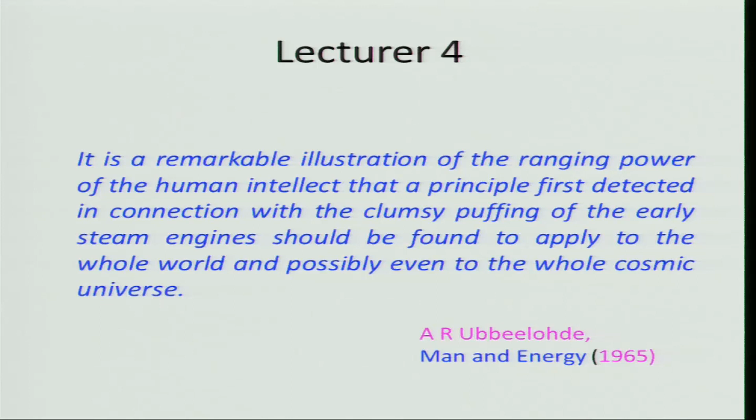Let us start this lecture with a thought from Ubbelohde, who says that thermodynamics is a remarkable illustration of the ranging power of human intellect, that a principle first detected in connection with the clumsy puffing of early steam engines should be found to apply to the whole world and possibly even to the whole cosmic universe. That means thermodynamics is a very important subject that encompasses all the processes occurring across the entire universe.

Before getting into the tenets of thermodynamics, let us look at how aerospace propulsion can be based on three subjects. One is thermodynamics, basically the engineering thermodynamics we will be looking at, and another is gas dynamics. Keep in mind gas dynamics is connected to thermodynamics as well, and so is combustion, which is very important because we are interested in propulsive devices that use chemical energy.

So we will be looking at all these fundamentals related to these three things first, because these tools will be important to analyze the propulsive devices. Now we will be reviewing thermodynamics, because you have already learned on several occasions about the basic principles of engineering thermodynamics, but for completeness sake I will start from the very basic principles.

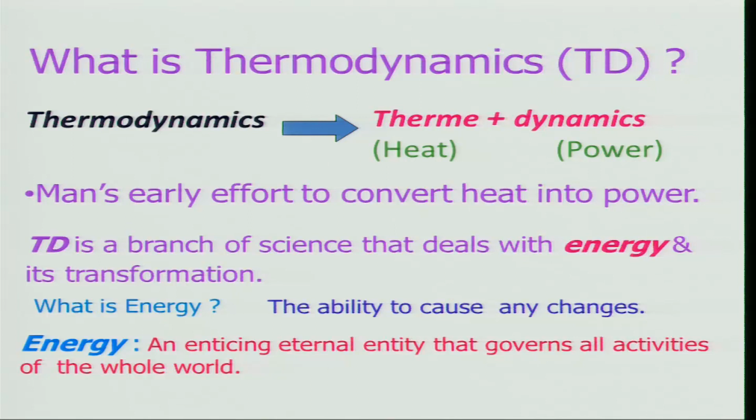So, everywhere energy is there. Whatever you see, any action, any reaction, anything occurring across the whole universe is nothing but a manifestation of energy. That is very important. Therefore, I can define energy as an enticing eternal entity that governs all the activities of the whole world. World means the entire universe - stars, planets, galaxies, and even our day to day life. All is basically a manifestation of energy.

Whenever I want to have a thrust power, I need to use chemical energy and convert it into thrust power in aerospace propulsion. Of course, you can use other forms of energy, as we have already discussed - nuclear energy, solar energy, and electrical energy. But basically what you are doing is trying to convert or utilize this energy into thrust power. That is the basic idea of propulsion.

So, whenever you talk about thermodynamics, can it be connected to life? If you recall, thermodynamics has three basic concepts or principles on which it works. One is energy, which we have already discussed. There is another concept known as entropy, which we will discuss later. And whenever you talk about energy and entropy, we need to talk about equilibrium. These three are connected to each other, and together they govern the principles of engineering thermodynamics, or classical thermodynamics.

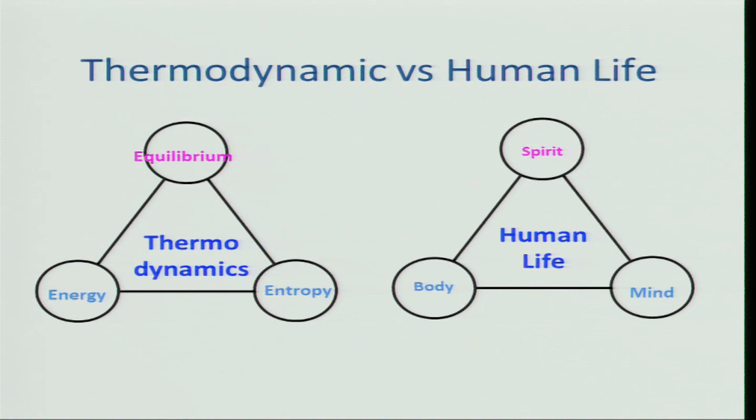Now, if I compare this with life, what are those things? One is your body, other is your mind, and this is the spirit. This is very important for sustaining a balanced human life. These three components must be balanced, and that is the basic objective of education - to have a balanced life between the body, mind and spirit.

When you look at the present or modern education system, it does not subscribe to these things. That means it is violating the basic principle of thermodynamics, which is governing all the activities of the world, according to me.

It is not according to me, but the great scientist Albert Einstein feels that way. He comments that a theory is impressive, the greater the simplicity of its premises, the more different kinds of things it relates, and the more extended its area of applicability. Therefore, the deep impression thermodynamics made upon me - it is the only physical theory of universal content which I am convinced, within the framework of applicability of its basic concepts, will never be overthrown.

That is the power of thermodynamics. But let me remind you that it is the steam engine which brought forth this subject as a magnanimous subject that encompasses all the processes or activities of the entire universe. That means engineering leads to a science which is now very extensive in nature.

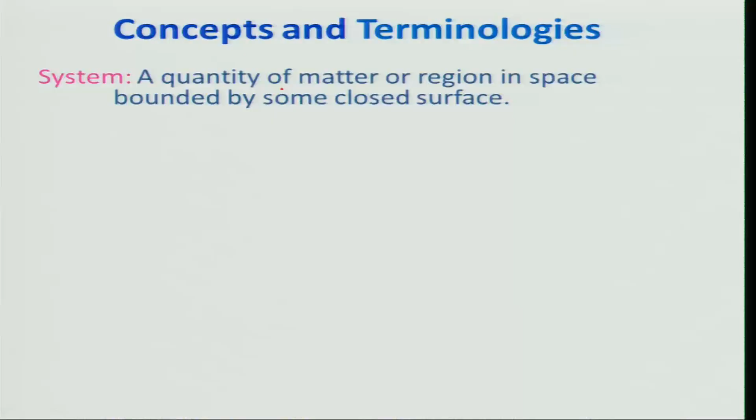Let me take another example of a hot coffee cup. If I take a hot coffee cup and keep it on a table, I am interested to look at how it is interacting with the surrounding. What will be the surrounding? First I need to identify the system, its boundary, and when I identify a boundary, I need to look at what I should consider as a boundary. Should I consider the hot coffee, if it is full to the brim of the cup, as the boundary, or should I consider the full cup itself as the system boundary? That depends upon your choice and what you want. But what will be its surrounding?

How will I identify what is its surrounding? Suppose my cup of coffee is here, and if you are sitting far away, can I consider this as surrounding for this system? By definition it is, but it cannot be. How?

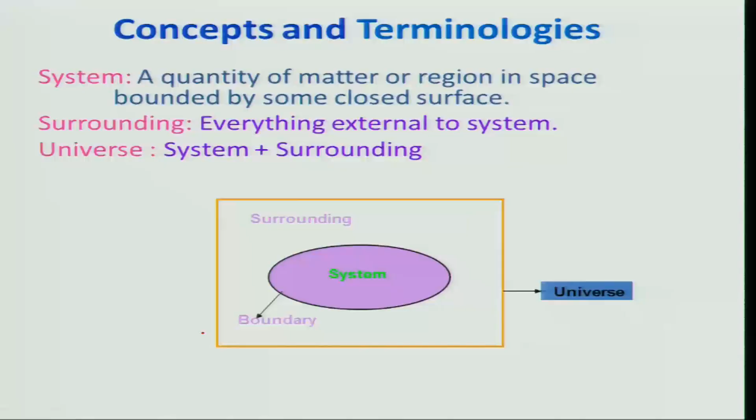So what we need to look at basically is the boundary. The boundary can be real or imaginary, and it separates the system from its surrounding - that we already know.

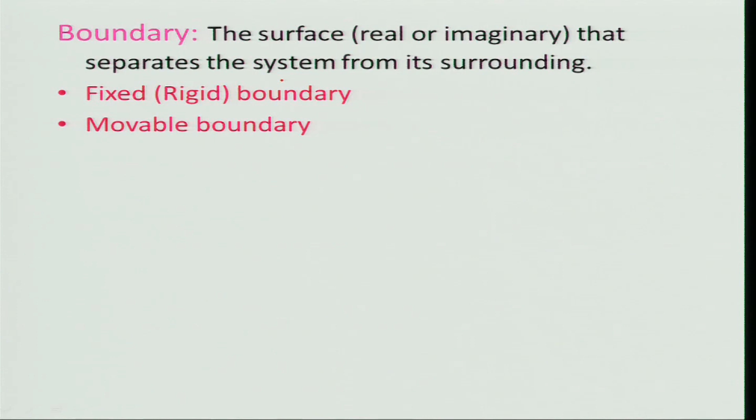But how many ways can we divide or classify this boundary? There can be a fixed or rigid boundary, there can be a movable boundary. There can be a diathermal boundary where heat interaction takes place between system and surrounding, and there is another type of boundary where there is no heat interaction taking place - we call this an adiabatic boundary.

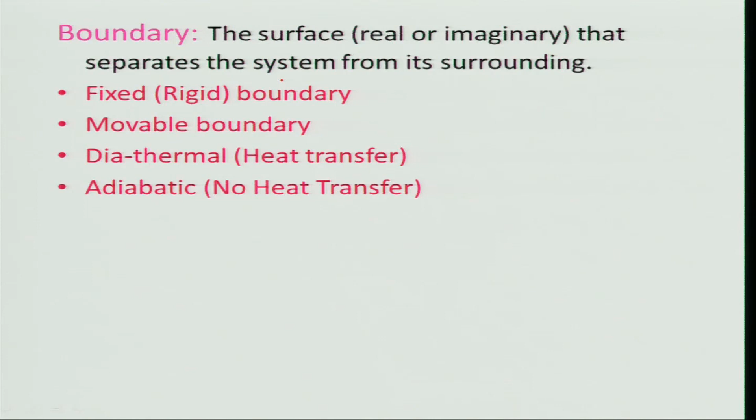So we are aware that there are several kinds of boundary, but in the case of propulsive devices, can we use this, and where and how we will use it is a matter we will be concerned about. So let us look at how many ways we can classify a thermodynamic system. Can anybody tell me, since you all know these things, I just want to review it - how many ways can we classify the thermodynamic system?

What are those? Open system, closed system and isolated system. That means we can classify the thermodynamic system into 3 categories: open system, closed system and isolated system.

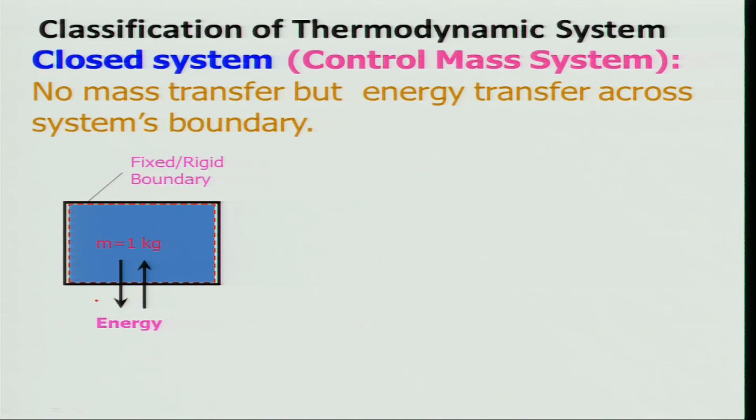So there will be change in the pressure, because volume is remaining constant. There will be interaction between system and surrounding, because this dashed line which I have shown is your system boundary, and nearby is known as the surrounding. Now this is known as a control mass system or a closed system.

And if I take a piston cylinder example, in this case the mass remains constant, it is not going out of the system boundary, but there is a heat interaction.

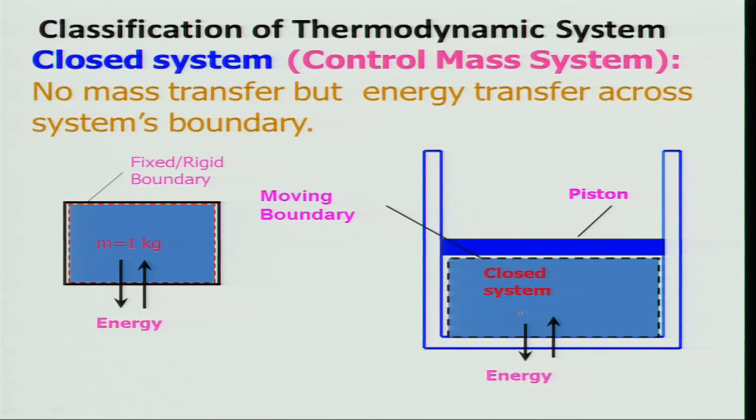Now, if you want to know how we can use this closed system in case of propulsive devices, can we really use it? Let us look at a closed system and how we can identify a boundary, because unless we identify a boundary, we cannot say which is our system. Both system and surrounding without any boundary will be the same.

So let us consider the earth, which I have shown here. This is the beautiful earth, looks quite interesting, and these white color things are because of precipitation. There will be a lot of mass coming, evaporated, going, and recirculated, and also your pollutions and other things.

Now what is happening? The heat is coming from the sun as solar energy input into the surface, and some of the heat will be going out as I have shown. Now I am interested to find out what will be the surface temperature, and use it as a closed system.

So how will I go about it? For example, if I take this as my boundary, meaning the whole surface of the boundary, can I call it a closed system? I cannot, because there will be evaporation.

The earth contains 70% of water. So, therefore, evaporation will always be taking place across the whole globe, because we are interested in global temperature, not local. One temperature, what is happening, we are interested to find out.

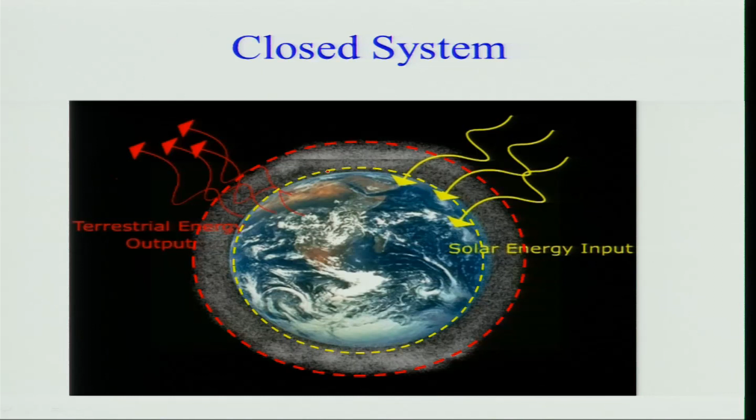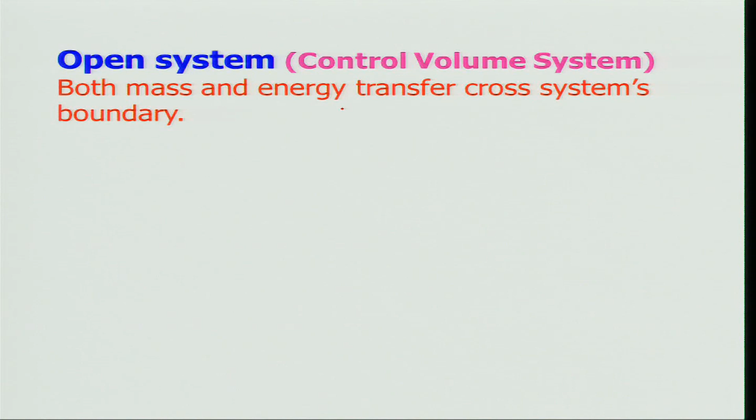Let us look at an open system, which we also call a control volume system. In this case, both the mass and energy transfer will be taking place across the system boundary. That means whenever the system is interacting with the surrounding, it will have transfer of mass and also transfer of energy.

For example, the same example I am taking, it is from the surface of the sea, where there will be solar radiation and also terrestrial radiation, evaporation and precipitation, all those things will be taking place.

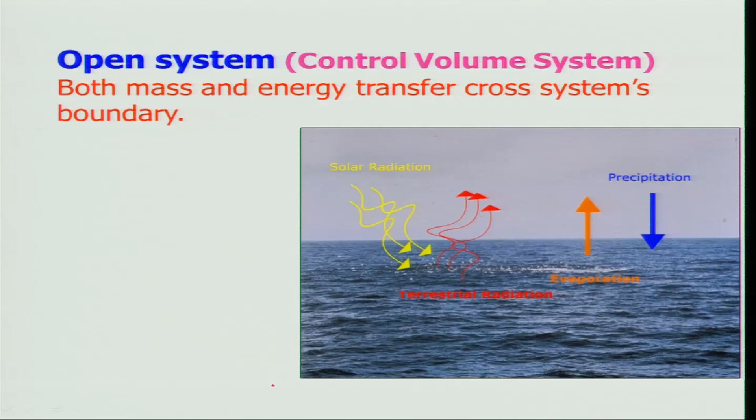If I want to have a boundary, I can take this as my system boundary and look at an open system, what is happening. For example, we can take an air intake in case of a gas turbine engine, where the fluid or air gets into this diffuser or air intake and goes out. There will be some interaction between system and surrounding, because this dashed line I have taken as the system and the rest will be surrounding. So we need to identify what to call a system.

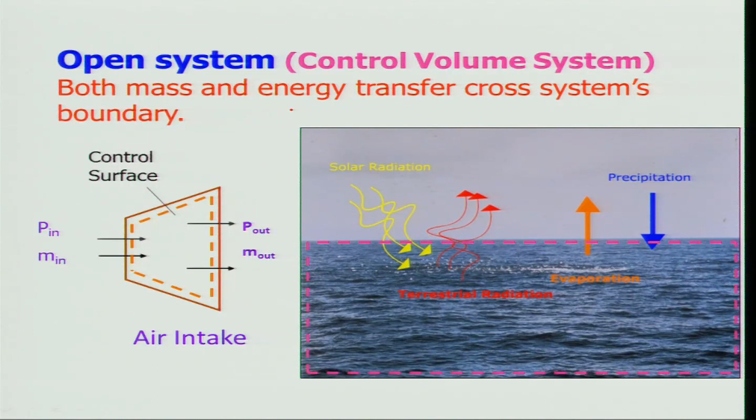Now the question arises whether we will go for a closed system or an open system, where it will be convenient, and how we choose its system boundary is a matter of concern that depends on the individual and the problem at hand. Most of the time, in our propulsive devices, we will be using the open system.

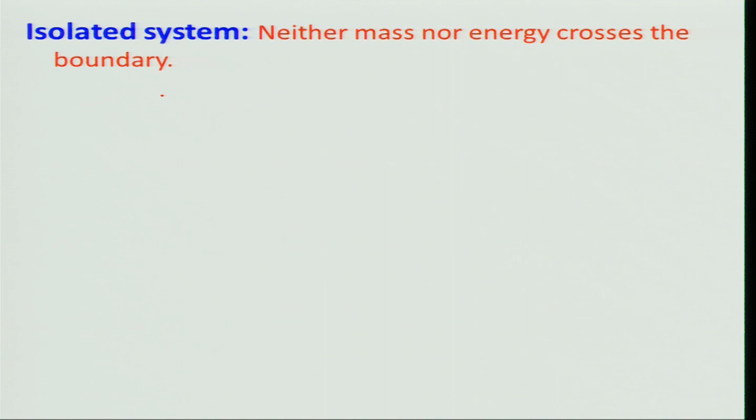However, whenever we are using the piston engine, we need to consider the closed system, and in some places we may consider an isolated system, where neither mass nor energy crosses the boundary, so there will not be any interaction. But then when will you use it? It is useless to have this kind of isolated system. Am I right? Then why is it there? Open system we may understand, closed system we may understand, but why an isolated system, with neither interaction of mass nor energy?

So far as a thermodynamic system is concerned, energy interaction is essential. But I want to get the answer from you. Let me just tell you briefly that this is used very much whenever you talk about the second law of thermodynamics, therefore it is very essential and important. I do not want to get into that here; please go back and look at your thermodynamics book and see how they have handled the analysis of entropy in a system.

So what I would suggest is that a particular type of system must be identified carefully for thermodynamic analysis of any problem, even in propulsive devices, because otherwise everything will be wrong. Unless your initial condition or identification of boundary is proper, all other things will fall apart. So therefore it is important.

Now whenever we talk about the interaction between system and surrounding, we need to look at how the properties of a system are changing, and what we mean by properties. This is important because a system contains a certain amount of matter, and it will be interacting and changing its state during that. So therefore we need to understand property.

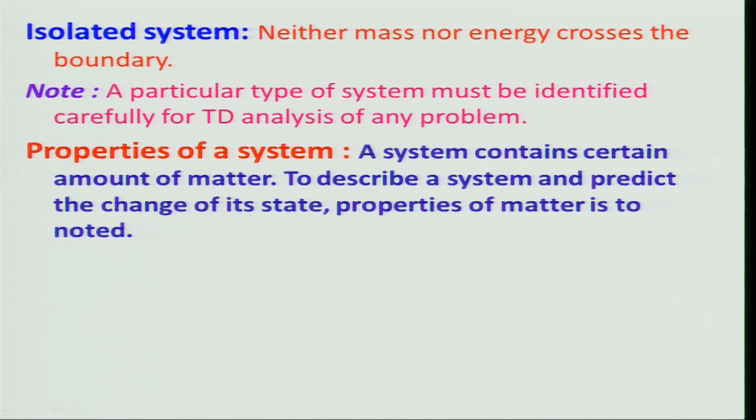So if we ask, what do we mean by property, it would be the state of the system, or the attributes of the system, or characteristics of the system. If I say, what is the property of a human being, can anybody tell me? We are all worried about the property of a system, a certain matter, maybe iron, what are its properties, what about aluminum, what are its properties, but we should know what is the property of a human being. That is more essential than talking about other materials, but we never worry about it, nor does education give an opportunity to think about it. I would suggest you think about it.

So a property is any observable characteristic of a system — attributes of a system which can change and which you can repeatedly observe changing. For example, if I say water is a colorless, odorless, or maybe tasteless liquid — is water tasteless or tasteful? Tasteless? That depends on the salt content it is having. So can I call these the properties?

We can call it a property, so far as the potability of water is concerned, but when we are talking about thermodynamics, we are not really interested in those properties — they are not of much value for thermodynamic analysis. So when we talk about the properties important for thermodynamics, we call them thermodynamic properties, which must be associated with energy and its transformation, because thermodynamics can be considered the science of energy, its interaction, and its transformations.

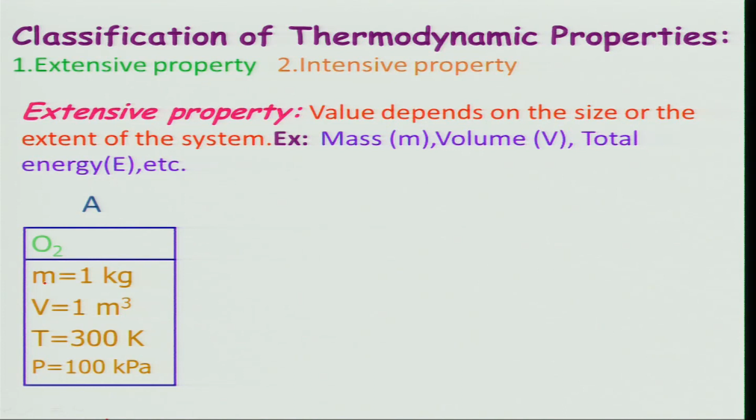Consider tank A contains oxygen with mass of 1 kg, volume of 1 meter cube, temperature of 300 Kelvin, and pressure of 100 kPa. I will take another tank with the same volume, same mass, and same properties, and add them together. What do we get? We get a volume of 2 meter cube, mass of 2 kg of oxygen, and the temperature is still 300 Kelvin and pressure is still 100 kPa.

So that means if you look at temperature and pressure, they are not changing whenever you add or in some cases subtract. That means it does not depend on the extent or size of the system. Therefore, we call it an intensive property.

However, we also use another property known as specific property. For example, specific volume. By definition, specific volume is volume divided by mass. Volume is an extensive property, mass is also an extensive property, so the ratio of it is an intensive property. We will be using that, but I will not discuss it now, as you are all aware of it.

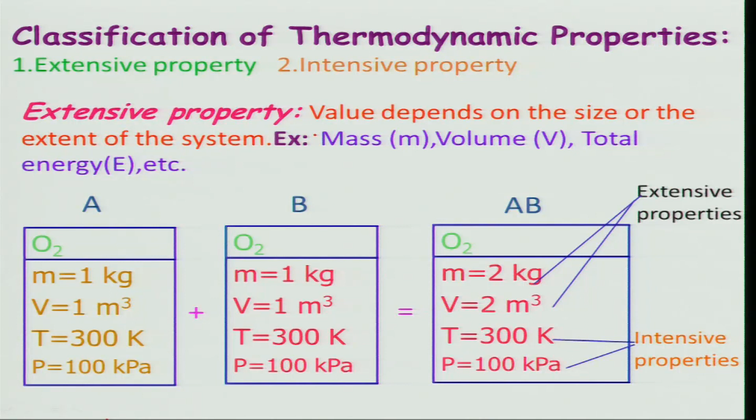So, what do you mean by thermodynamic equilibrium? You must be knowing that engineering thermodynamics always deals with equilibrium systems. So we must understand what it means for a system to be in thermodynamic equilibrium.

Let us consider a copper block at 70 degrees Celsius and another copper block at 30 degrees Celsius, separated by a divider. Then we remove this separator so both blocks come in contact, and allow enough time such that there is heat transfer from copper block 1 to copper block 2, until it reaches a temperature of 50 degrees Celsius. That means it has reached a steady state and equilibrium, because everything is insulated. This block together is in equilibrium; there is no change occurring between these two blocks.

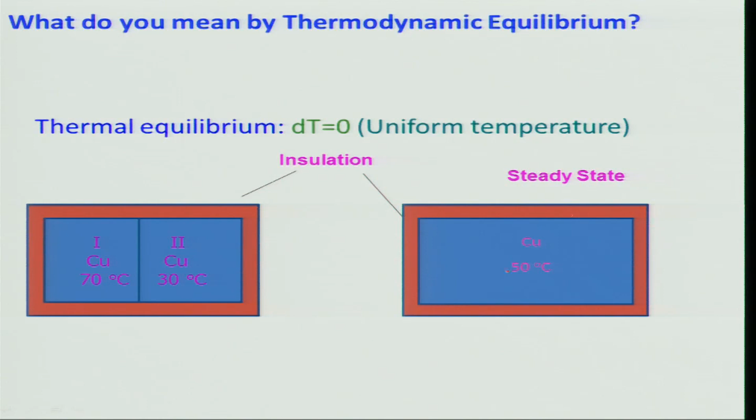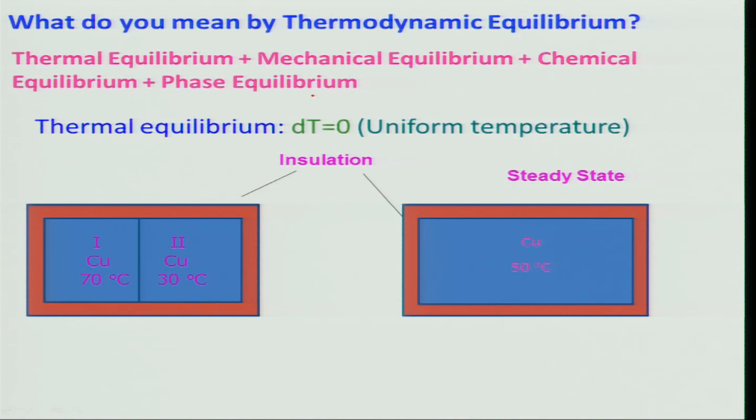So, can we call it a system in thermodynamic equilibrium? Yes, but certainly no—it is basically thermal equilibrium, meaning uniform temperature across the system. Something is missing. We call a system to be in thermodynamic equilibrium only when all these equilibria—thermal equilibrium, mechanical equilibrium, chemical equilibrium, and phase equilibrium—are being satisfied and maintained.

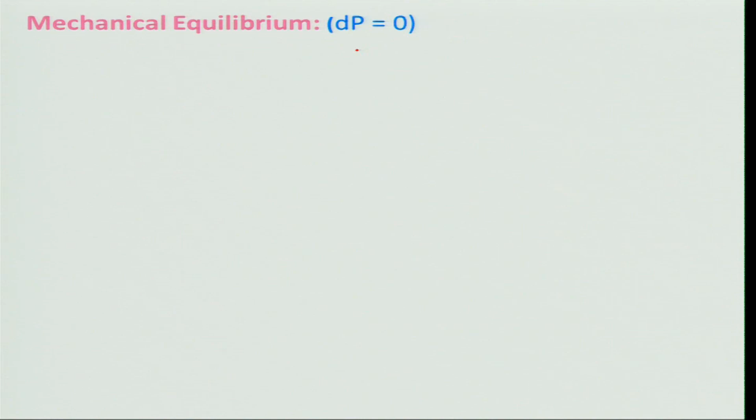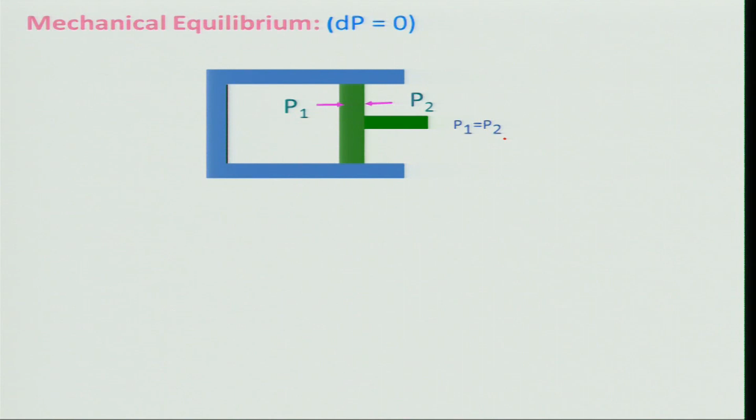So, let us consider what we mean by mechanical equilibrium, where pressure difference across the system boundary will be zero. For example, if I take a piston cylinder arrangement and consider this white portion as our system, there is a pressure P1 applying and an external pressure P2; when P1 equals P2, we call it mechanical equilibrium.

Let us consider another example: hydrogen, 2 moles of hydrogen reacting with 1 mole of oxygen, giving the product of 2 moles of water, at a particular high temperature, meaning some reaction is taking place, otherwise water will not be formed at low temperature. If I allow this reaction to take place for quite some time, we will see there is no more reaction taking place. But it is not true — what is happening is that the forward reaction rate becomes equal to the backward reaction rate, and then the system attains chemical equilibrium.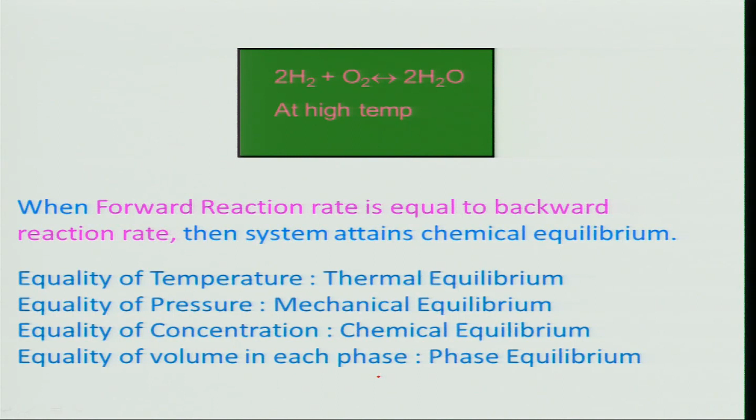So let us try to recall what we mean by a reversible process. Whenever a system and surrounding return back to its initial state, we call it a reversible process. So all reversible processes are quasi static, but all quasi static processes are not reversible.

So what do you mean by quasi static? Can anybody tell me? Because this concept you will be knowing, I have not discussed it.

So when a reversible process begins, it is very slow. That means the gradient which will be there is very small, such that the changes will not be occurring abruptly, or the change will be very infinitesimally small. So there we call it a quasi static process.

For example, if I take a piston cylinder and put some sand grains on top of the piston, and then I remove a small sand grain from it, there will be a change in the gas system's pressure and the surrounding, but that change is very small. So therefore we call it a quasi static change.

Now, in life what do we need? We need to have a quasi static process, so that any changes occurring will not affect yourself or others dramatically or drastically. However, change is inevitable. So those quasi static processes are essential, but all quasi static processes need not be reversible. Keep in mind that all natural processes are irreversible in nature, but in thermodynamics we will be discussing more about reversible processes.

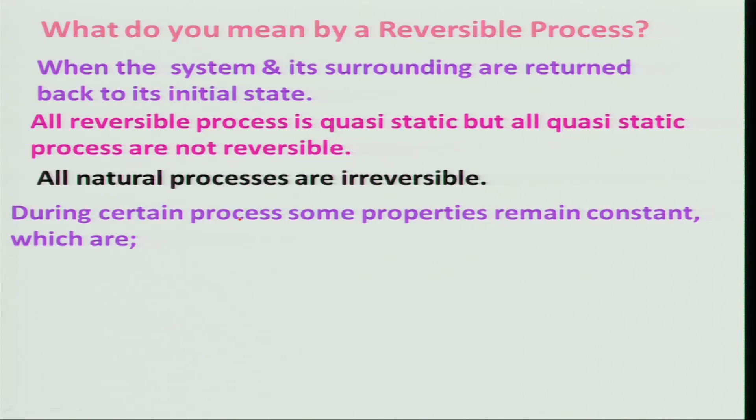During certain processes, some properties remain constant. For example, if temperature remains constant, we call it an isothermal process. If pressure remains constant, we call it an isobaric process. If volume remains constant, we call it an isochoric process. And if it is adiabatic, meaning no heat interaction between system and surrounding takes place, and reversible, then we call it an isentropic process.

So these processes which we will be using, particularly the isentropic process and isobaric process, will be used while analyzing the propulsive devices.

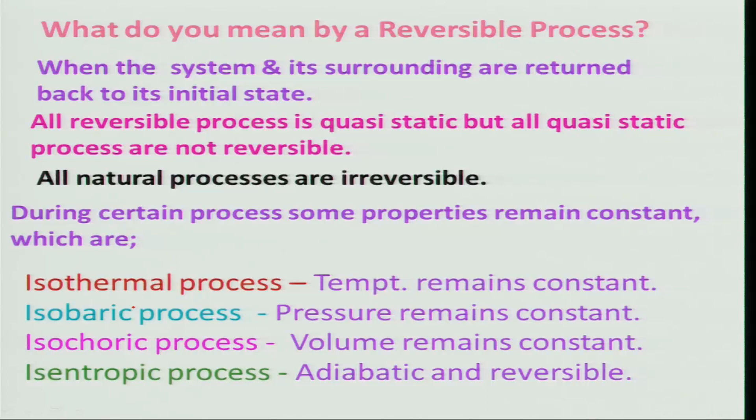Now the question arises, what do we mean by temperature? Because without temperature you cannot really think about any heat interactions. What do you mean by that? It is basically, in layman terms, a measure of hotness or coldness, whether it is cold or hot, and it is basically a qualitative description.

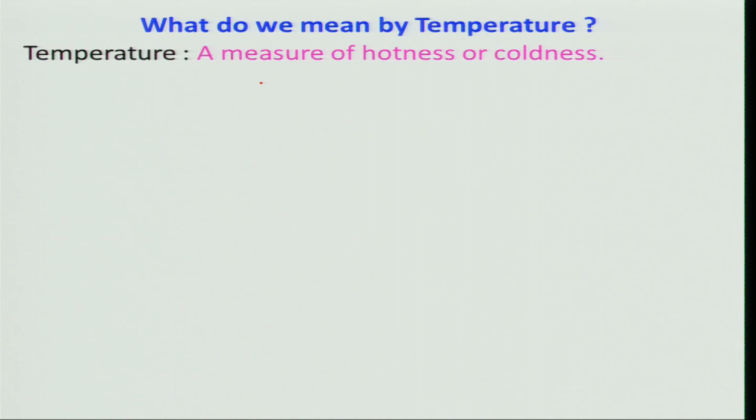That means it will be cold or warm, or it may be hot, it may be red hot, but can we really talk about it quantitatively? Then it will be a problem, because our senses may be misleading. It depends upon person to person, and depends upon the mood of the person also, and it will be misleading.

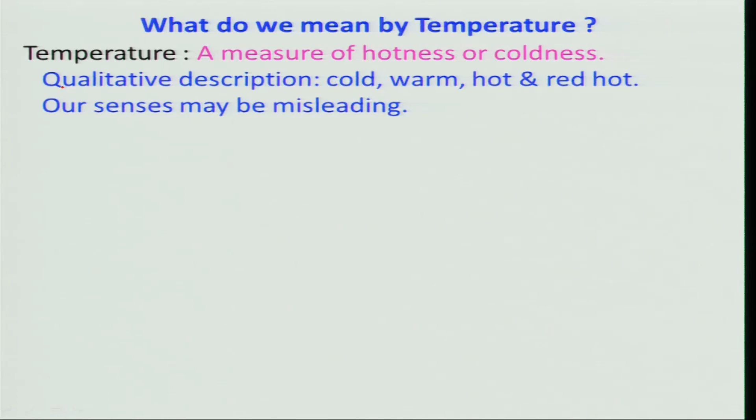Even if you take another example which is not having sense, but man can have a sense to observe. For example, if I take one wooden chair and one metal chair, kept at the same room, let us say in this AC room, having the same temperature almost, but if you go and sit down, or put your hand on it, you will feel that one of them is colder. Which one will be colder? Metal will be colder, whereas the wooden will be not that much compared to this. So therefore, it will be misleading.

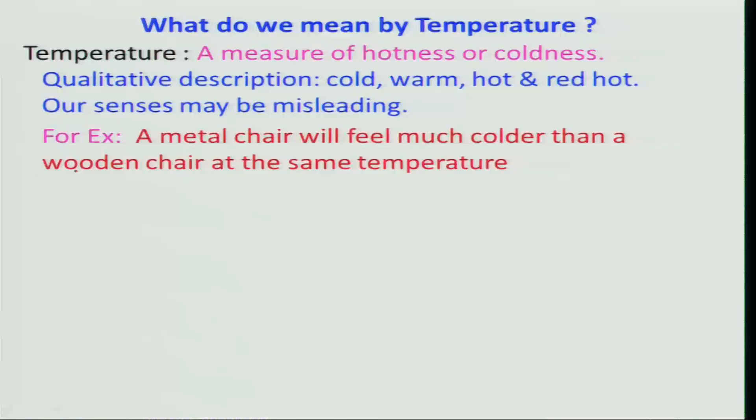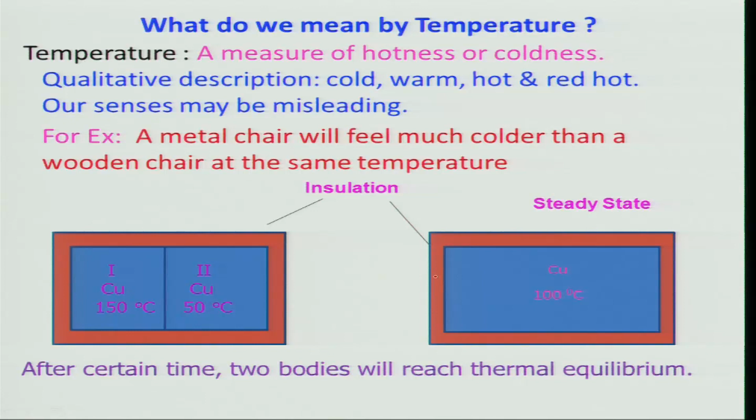Remember that whenever you have fever, we always use a thermometer, and then we allow some time for contact between the body and the thermometer bulb, and then you measure the temperature. So that we do routinely, and this is the basis of thermal equilibrium, the basis of the zeroth law of thermodynamics.

Let us consider there is a block A which is in equilibrium with B, and there is another block which is also in equilibrium with C. The block C is in equilibrium with B. That means the block A is in equilibrium with the block C. That is nothing but the zeroth law of thermodynamics: if two bodies are in thermal equilibrium with a third body, they are also in thermal equilibrium with each other.

This is a very common thing which was formalized by R.H. Fowler in 1931, after the first and second law were proposed. Therefore, it is known as the zeroth law. If you look at Galileo, he had devised a thermometer at that time, so it is not a new thing, but he formalized it. It is a thing which he experienced, but we did not formalize it into a law, and this law is the basis for temperature measurement, as I told just a few minutes back.

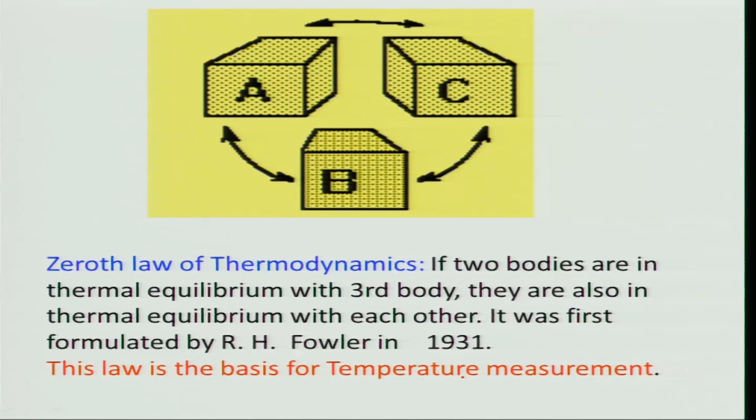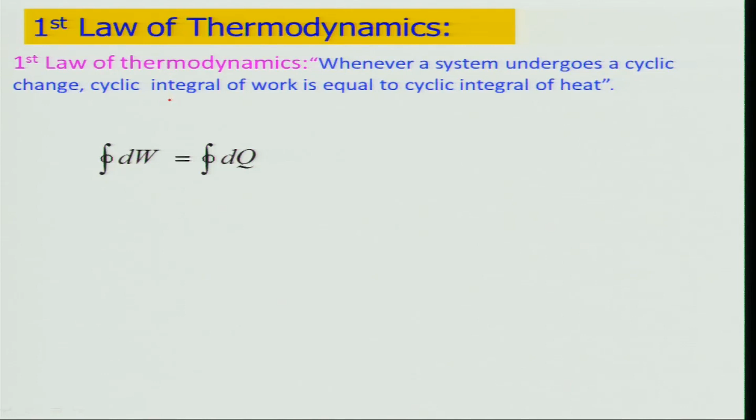So what we will now look at is the first law of thermodynamics. We state that whenever a system undergoes a cyclic change, however complex the cycle may be, the cycle integral of work is equal to the cycle integral of heat. So we say that the cycle integral of work is proportional to the cycle integral of heat. Keep in mind that for SI units, this proportionality constant is equal to 1. Therefore, I have stated directly that whenever a system undergoes a cyclic change, the cyclic integral of work is equal to the cycle integral of heat, and it was first proposed by the great scientist J.P. Joule in 1851.

Conducting a series of experiments, he took some 4 years to conduct several experiments to make this statement in a very systematic manner. And if I write it down in this form, that is, the cycle integral of dq minus the cycle integral of dw is equal to 0. This work is basically on the system, and if it is on the system there will always be a negative sign, as you know the sign convention, and work from the system is basically positive.

So the first law of thermodynamics is a generalization of several experimental data generated by J.P. Joule, who formulated it as the first law of thermodynamics. There was another person who was also working simultaneously or parallelly along with him, but he is not considered the proposer. Till now nobody has disproved this law, but it cannot be proved like a theorem in mathematics. That does not mean that nobody will prove it wrong. Maybe some of you may try it out, and then we will have to see.

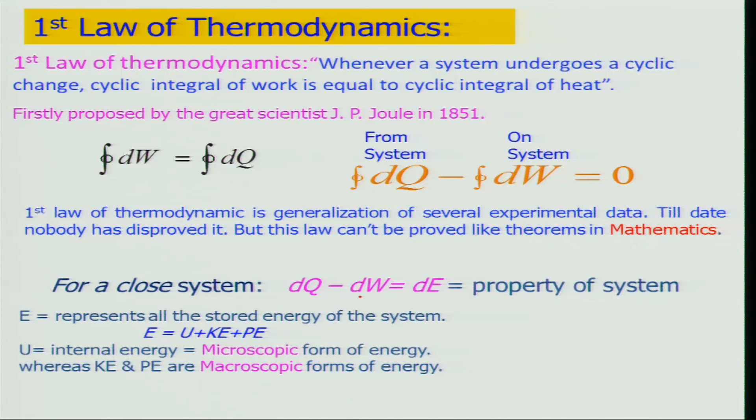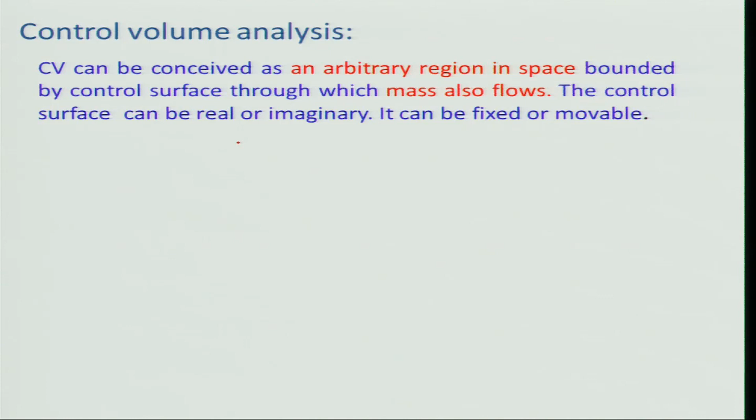So let us look at how we can apply this first law of thermodynamics for an open system, because we will be using it for the analysis of propulsive devices. Therefore, we need to learn how we can use this equation, the closed system equations, for an open system. We will elaborate a bit on this: a control volume can be conceived as an arbitrary region in space bounded by the control surface through which mass can also transfer or flow, and the control surface can be real or imaginary, fixed or movable.

Let us consider a system containing shaft work, which has heat interaction, and some flow is entering into the system while some mass is leaving the system. I have taken this dash line as my system boundary. If you look at this, it's basically an imaginary boundary — there is flow, there is no solid boundary, but you are imagining as if the boundary is there. Now, how do we analyze this?

For this, we need to understand how much mass is entering, how much mass is going out, and how much is being accumulated in the control volume. This is expressed mathematically as dm/dt equals m dot CV, which equals the summation of m dot in minus summation of m dot out. Keep in mind this is a general equation, but in this case there is only one inlet and one outlet, so for this control volume it will be dm/dt equals m dot in minus m dot out.

This is basically the law of conservation of mass, which is based on common sense — like your money flowing: how much money you are getting, how much you are using, and how much is being accumulated. So it's very much common sense you can apply, and this is known as the continuity equation as well.

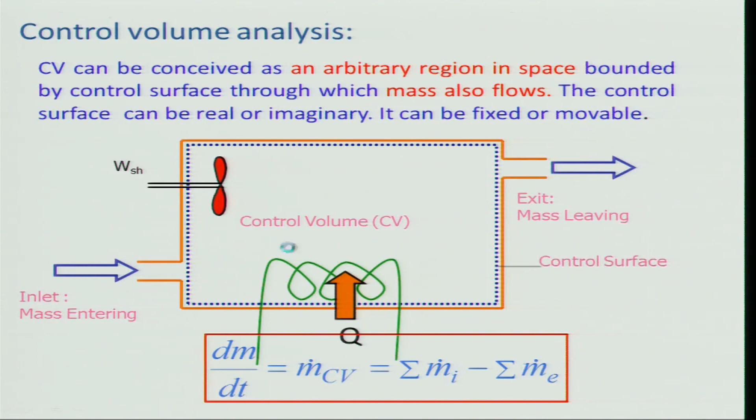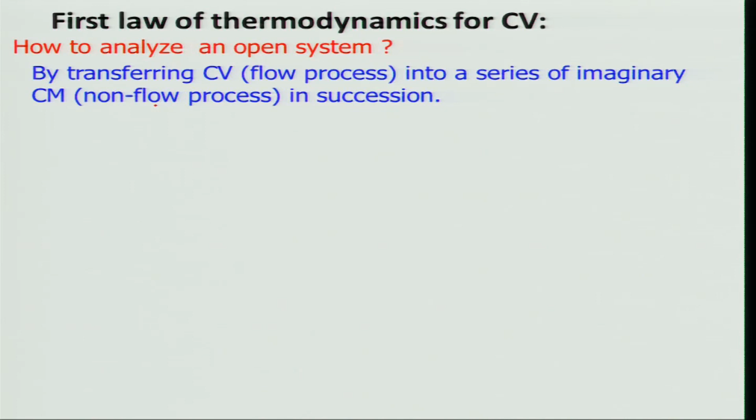We will be using it profusely, and let us look at how we can analyze an open system, particularly applying the first law of thermodynamics. So what we will do is consider the system as transforming into a series of imaginary non-flow processes in succession.

That means, you might have taken some videos — if you look at the flow, mass is coming in, mass is going out. Now, if I take a video for a certain time and convert it into snapshots, then what will happen? Each moment it will be different. So we will consider that the initial state is a control mass.

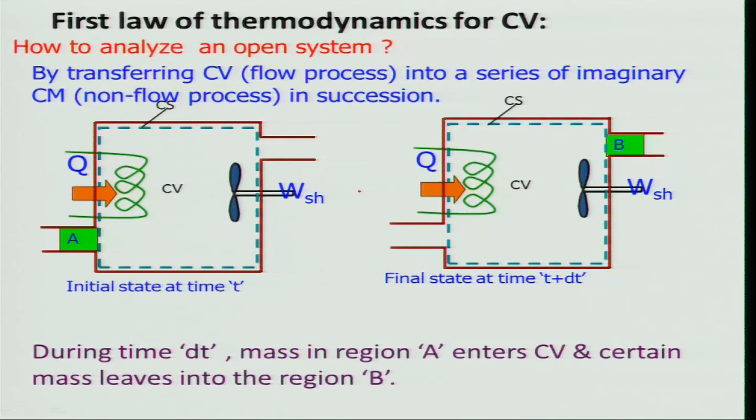During this time, mass enters the control volume and certain mass leaves into the region B. During this process, some work is required to move mass into and out of the CV, and we call this flow work, which means for maintaining the flow through the control volume, since the flow will be coming in and going out.

So you can imagine as if there is a piston pushing the fluid, as I've shown here, entering into the control volume. Similarly, a piston is moving out, sucking the fluid out.

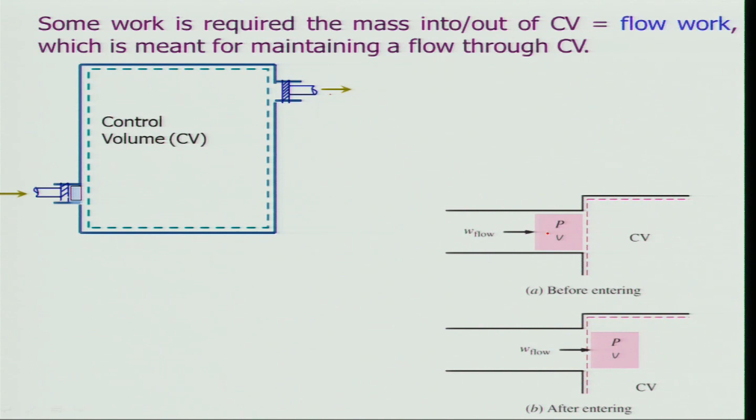So if you look at flow work, that means a certain amount of pressure applied with a certain amount of specific volume, P into V, will be the work done. This is before entering the system, and there will be flow after entering the system. It is just about to enter, and this is already entered.

If you look at it, taking a piston under equilibrium condition, P times A is nothing but the force being applied on this piston. So the work done by this imaginary piston - keep in mind, we are just imagining, actual piston not there - it is flow work, which is being pumped by either a compressor or, in case of a liquid, a pump.

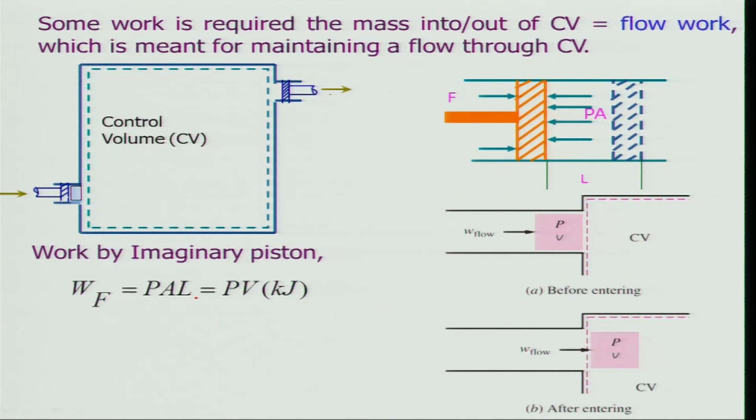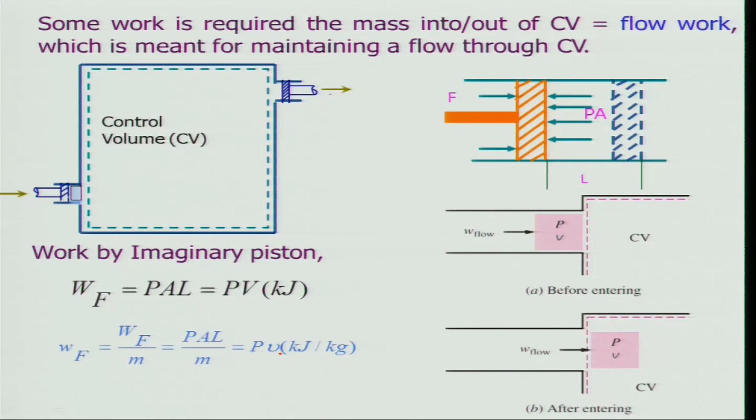So the work done will be P A L, that is force into displacement, which gives P V, that is work done. So specific work will basically be work done per unit mass, that is P times specific volume, in kilojoules per kg. What is the work done by the flow at inlet during time dt?

W I is equal to minus P I V I m dot I dt, which we have already seen. Keep in mind that the negative sign is here because this is work done on the system, and as per convention, work done by the system is positive.

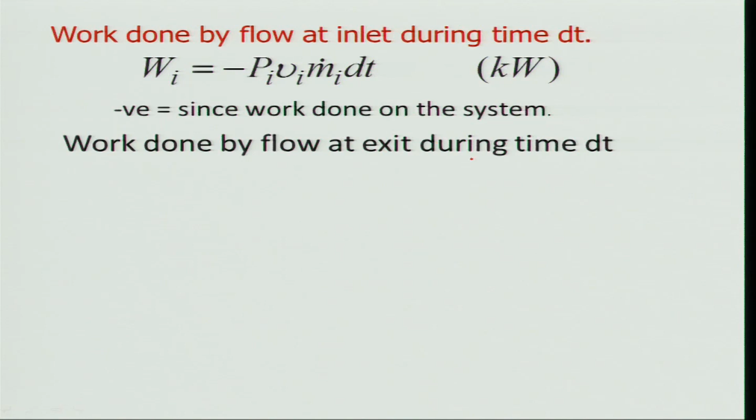So work done by the flow at the exit during time dt will be W E equals P E V E m dot E dt. And the total energy of the fluid, E total, at time t will be the total energy at t plus the energy due to the flow work, that is m dot I E I dt.

Keep in mind what this capital E t is - the total energy in the control volume at time t, which consists of internal energy, kinetic energy, and potential energy in our case, though there might be other forms of macroscopic energy. And e small t means total specific energy at time t, that is u, the specific internal energy, plus V squared by 2, and G z, the potential energy.

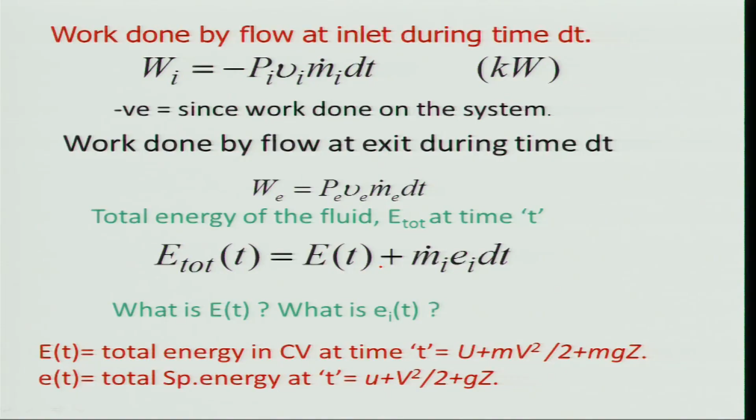So what we will do is look at this energy balance across the system during time dt, and try to derive an expression for a control volume system as far as the first law of thermodynamics is concerned.

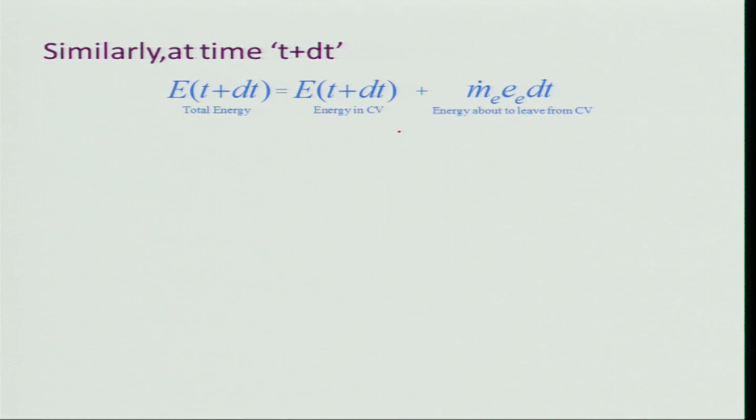Similarly, at time t plus dt, the total energy E(t+dt) is equal to the energy in the control volume plus the energy about to leave the control volume.

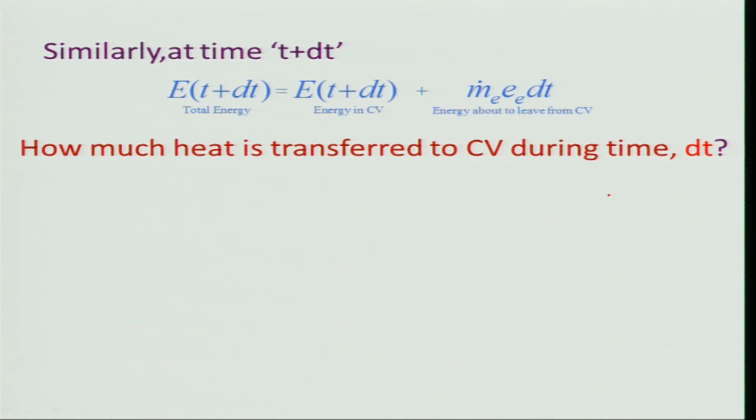So how much heat is transferred to the CV during this time? That will be Q dot dt, meaning the amount of heat per unit time into dt, which is the energy transfer as heat to the system.

Similarly, how much work is done by the system? Here I am considering shaft work - there might be other forms of work as well, such as electrical or electromagnetic work, which we are not concerned with here. So shaft work rate into dt will give me the shaft work done by the system.

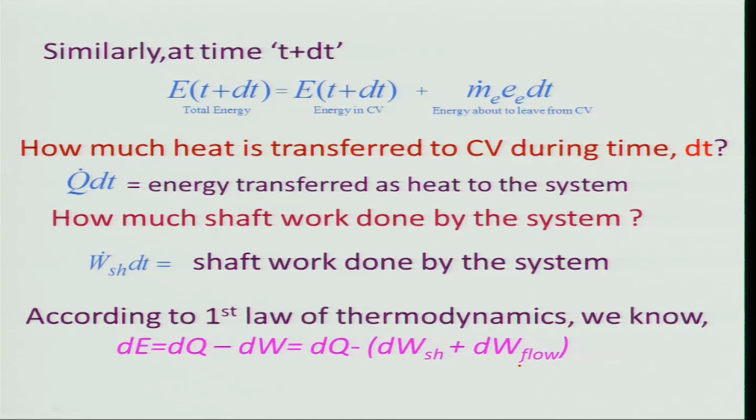So what we will do now is apply all these terms to the first law of thermodynamics for a control mass system or closed system, that is dE equals dQ minus dW. Keep in mind dW has two components: one is shaft work, which is our interest in propulsive devices, and the other is flow work. We are also interested in flow work because ours is an open system - most gas turbines and rocket engines are considered open systems.

So if I substitute all these values into that previous equation, I get the term: total energy at the exit minus total energy at the inlet equals Q dt minus W dot shaft into dt - this is the work done - and this is the flow work, which will be the flow work at the exit minus the flow work at the inlet, into dt.

If I divide this equation by dt and let dt tend towards 0, what will I get? I will get E at time t plus dt minus E at time t, divided by dt. These are the terms which will be flow work, and this is the energy m dot E, where E is the total energy leaving and entering the control volume, and this is your shaft work and heat interaction.

So if I rewrite this equation, I get dE by dt plus the energy going out, which is the mass flow rate at the exit into the internal energy, kinetic energy, potential energy, and flow work. Similarly at the inlet, there is the heat interaction and the work interaction, which can be shaft work or any other work.

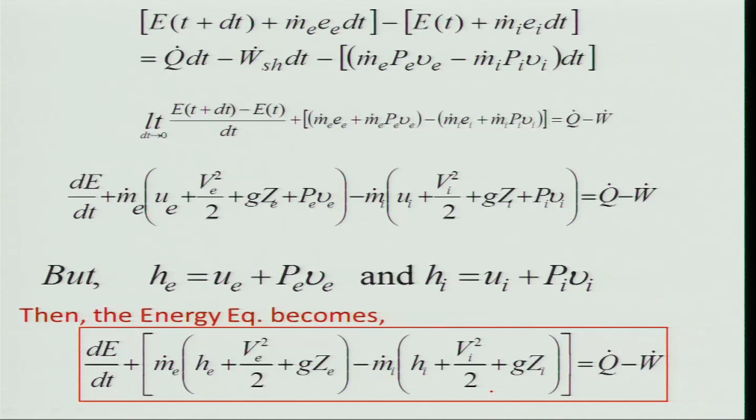By definition, HE is equal to UE plus PVE, that is, enthalpy equals internal energy plus flow work. So the total energy equation becomes dE by dt plus m dot in the bracket HE plus V square divided by 2 plus gZ, which is the energy going out from the exit of the control volume, and the amount entering into it, along with the heat interaction and work interaction. This equation will be used for our analysis of propulsive devices, so you should keep this in mind.

So what we will do now is look at some concepts. We have discussed the first law of thermodynamics for both the control volume and control mass system. Now we look at the second law of thermodynamics.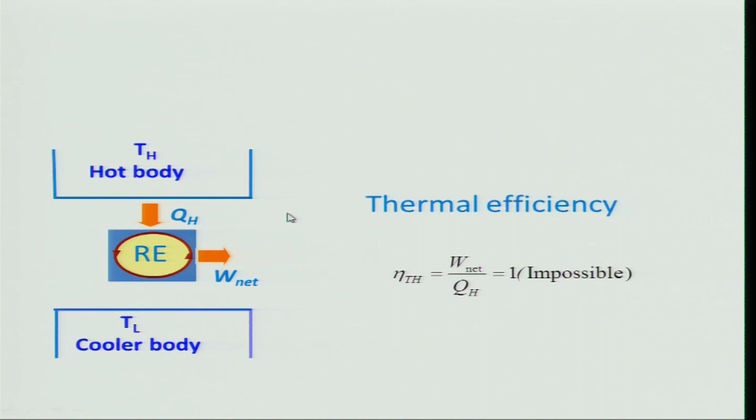Let us consider a reversible heat engine, which is absorbing a certain amount of heat, QH, from a thermal reservoir at temperature TH. It would be very interesting if it could convert all the heat into work. Then what would be our thermal efficiency? Thermal efficiency would be W net divided by QH, that means 100% efficiency.

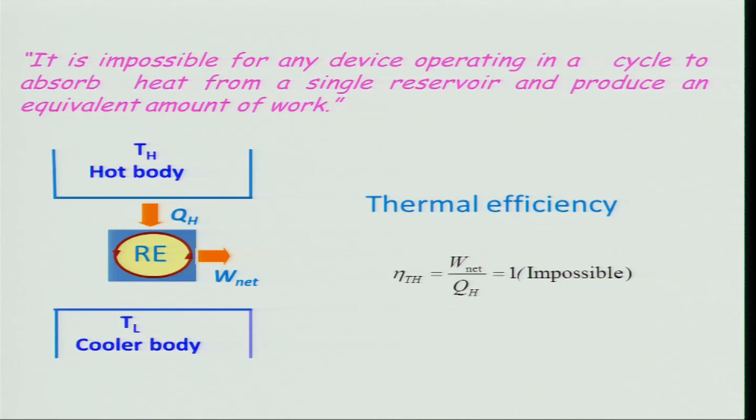Actually, it is impossible, and this observation was made by a scientist who stated that it is impossible for any device operating in a cycle to absorb heat from a single reservoir and produce an equivalent amount of work. This was stated by Kelvin and also another scientist, Planck, therefore we call it the Kelvin-Planck statement. This is known as the perpetual motion machine kind of thing, which takes all the heat and converts it into work. It would be interesting if somebody could do that.

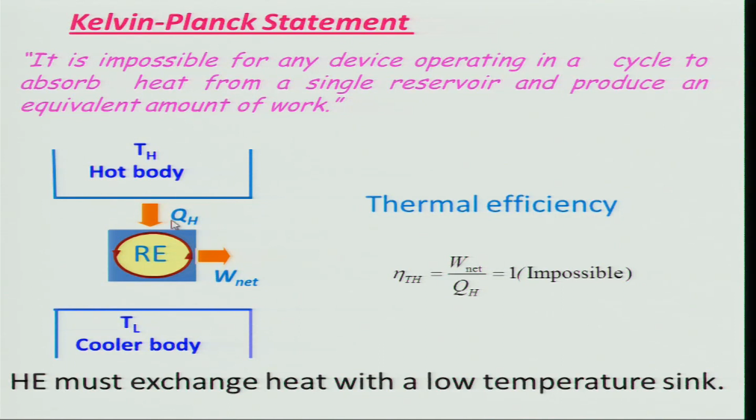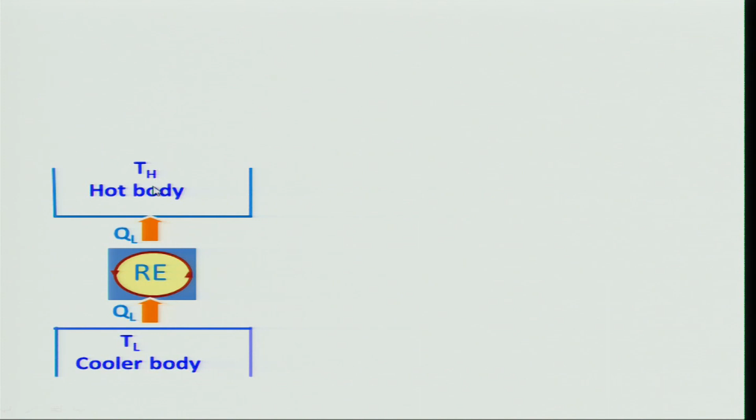Let us look at the other way around: a reversible heat engine absorbing heat QL from a lower temperature body and transferring it to a hot body at higher temperature. The question arises, is it possible? Actually, it is not possible. That means no spontaneous flow of heat is possible from a cooler body to a hotter body on its own.

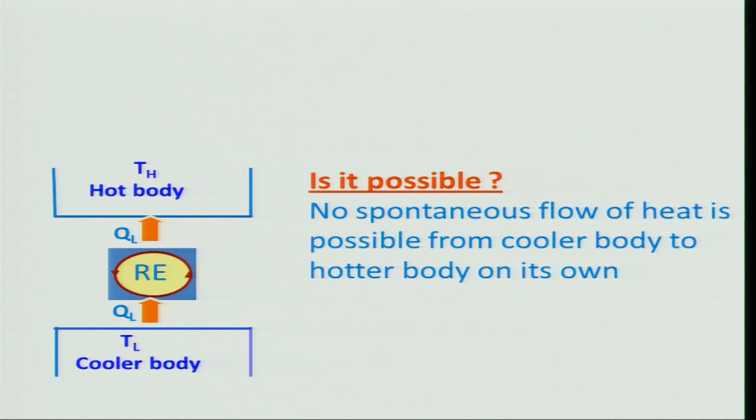However, if it is the other way around, heat can flow very naturally from the hot body to the cold body, as we always observe and experience. So that is possible, whereas the reverse is not possible, and that is known as the Clausius statement, which states it is impossible for any device operating in a cycle to produce no effect other than the transfer of heat from a cooler body to a hotter body.

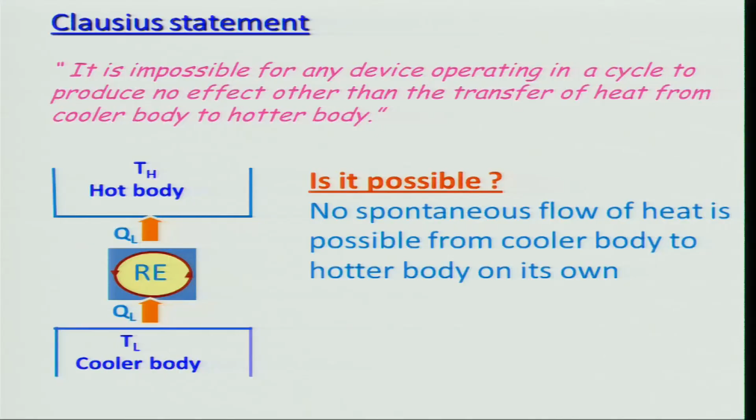These statements, although part of the second law of thermodynamics, can they help us analyze quantitatively? Certainly not; they can only give a qualitative way of interpreting the process, whether it is possible or not. But there comes another statement.

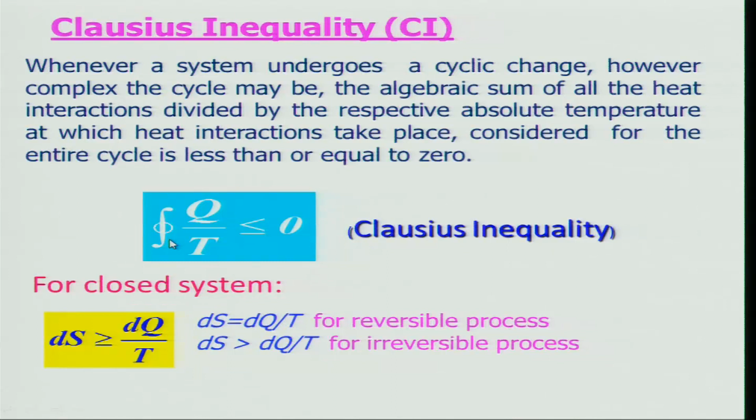Therefore, we need to derive the expression for the open system, which I will not be doing now—I will talk about it a little later on.

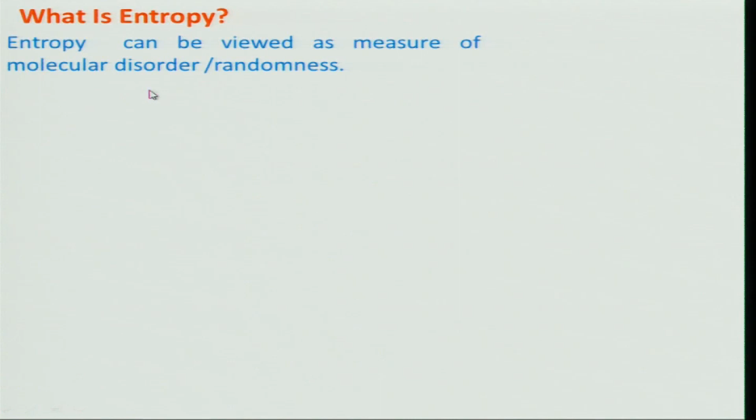But let us first understand what we mean by entropy. Entropy can be viewed as a measure of molecular disorder and randomness. If you look at a solid, it has very low entropy because its randomness is very low—the molecules are only vibrating, not moving apart like a gas where they go wherever they want in that space. So the liquid has low entropy and gas has higher entropy.

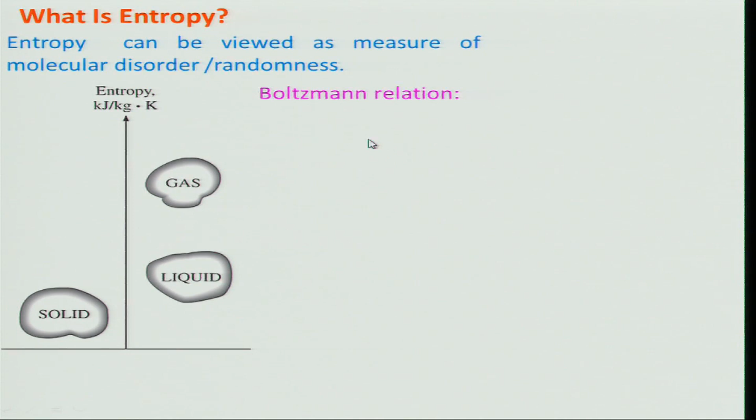The Boltzmann relation gives a definition of entropy, which states that entropy is equal to k ln P, where k is the Boltzmann constant and P is the thermodynamic probability. But how do we define it?

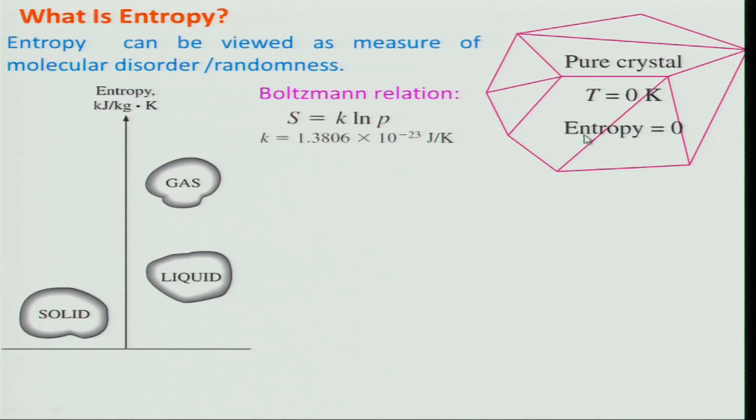Whenever we talk about entropy, we always talk about change in entropy. We may find the change in entropy from the Clausius inequality, but we need to know the actual value. For that, we look at a pure crystal—at temperature 0 Kelvin, entropy will be 0. That is the third law of thermodynamics, which states that a pure crystalline substance at absolute 0 temperature is in perfect order and its entropy is 0.

What is the meaning of this? It means the molecules will be vibrating, but at temperature 0 Kelvin they will not be vibrating, remaining in the same place. However, if it is a solution or some other substance, you cannot apply this statement—entropy cannot be 0 even if the temperature is at 0 Kelvin.

So it is very important to talk about this entropy. It is very useful in our day-to-day life as well, because our objective in life must be to reduce or minimize the entropy.

For example, if I take a load and some people try to pull in one direction, while others pull in another direction, can the load be moved? Certainly not. This is similar to what is happening in our country—each individual has their own selfish interest, so they pull apart from each other, not in a directed way. Therefore, entropy is very important, and it is important to look at it and handle it.

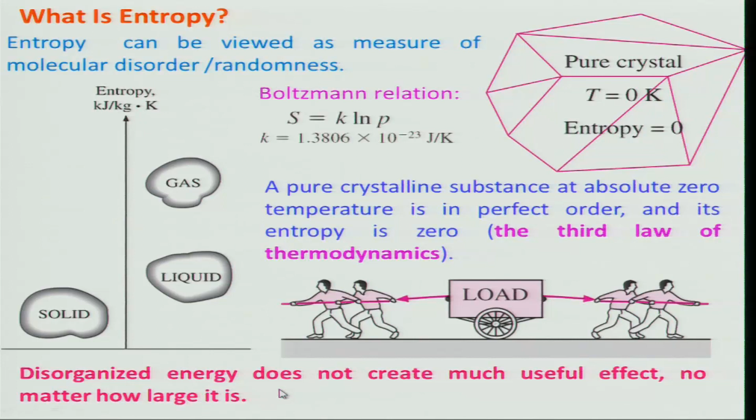Disorganized energy does not create much useful effect, no matter how large it is, and that is true for ourselves also. So let us now look at the second law of thermodynamics for an open system.

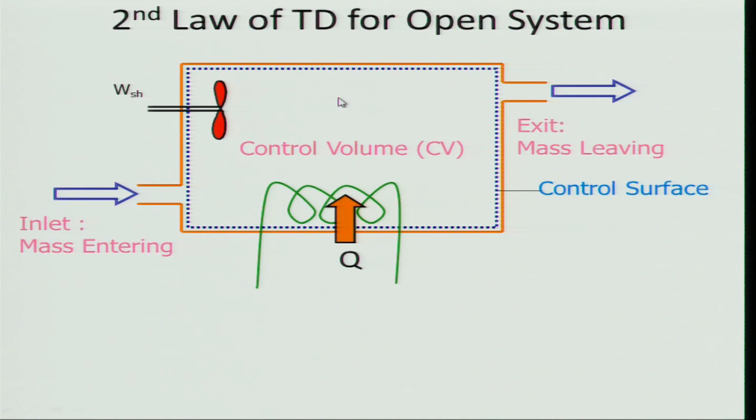I have already shown a system where shaft work and heat interaction take place, with mass entering and mass leaving. If we apply the Clausius inequality for the control mass in a similar way to what we used for the first law of thermodynamics for a control volume, we arrive at the expression: ds/dt equals the mass flux at the inlet into entropy, plus Q by T, minus the total entropy leaving with the mass exit, plus Sg, the entropy generation rate during time dt, and heat transfer rate during time dt.

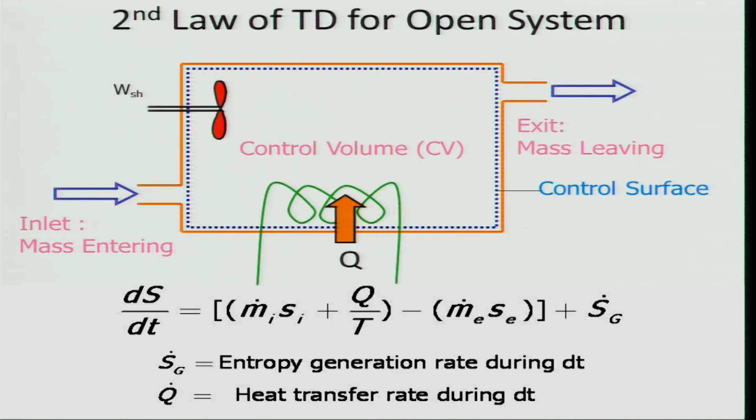This is the portion we have covered now. Let me summarize what we have learned today. We learned about various concepts and definitions of system and its surroundings. Then we moved into the zeroth law of thermodynamics, first law of thermodynamics, and second law of thermodynamics for both control volume and control mass systems. With this, we will stop here.